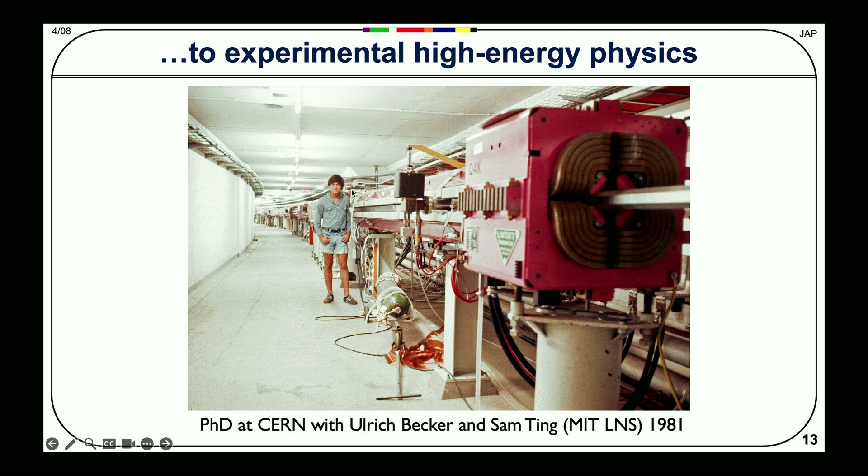That's me as a very young MIT grad student, working with Sam Ting's group, who had just won the Nobel Prize. That's my experiment at CERN, the intersecting storage rings, 62 GeV - more than 2 orders of magnitude less than what the LHC gets. But it was the highest energy at the time, about a half mile to 3/4 mile in diameter. Francois would know. This is what a big experiment looked like back then.

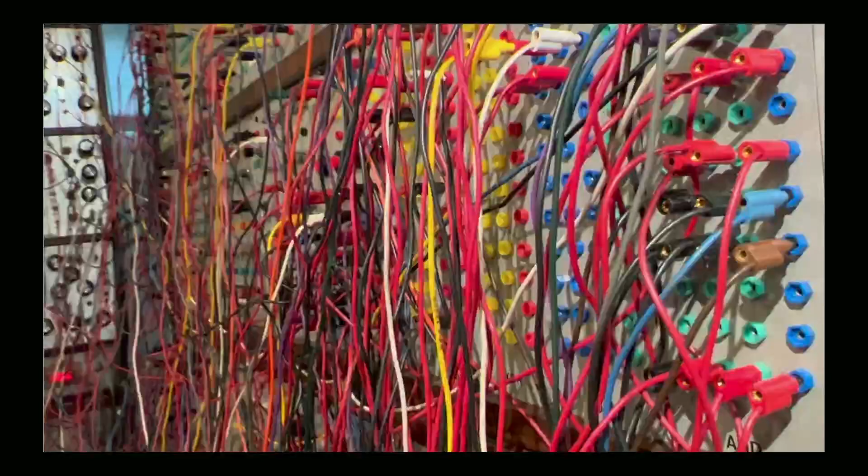This is, I think I showed this last time I was here. The last big patch I did about a year ago.

It's just again, dreaming to itself. Hundreds and hundreds of patch cords, lots of complexity, lots of sound - just an incredible environment to work with to make sound. And it just evolves and changes and goes into different modes.

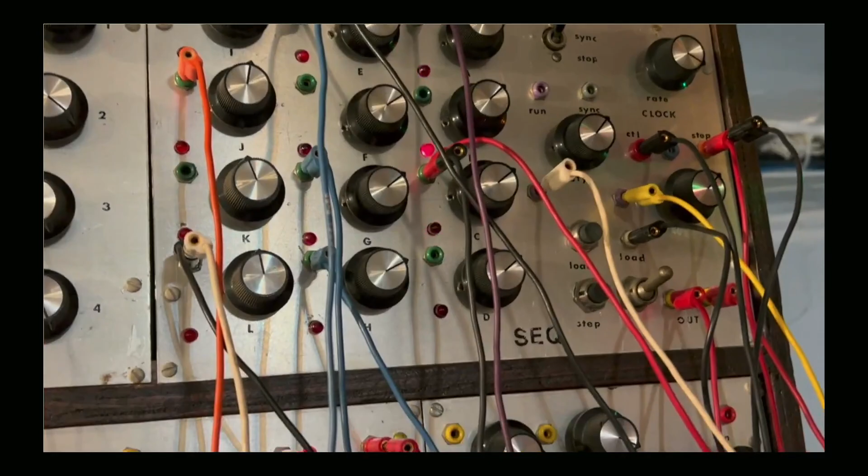I'm not touching a thing, it's just kind of dreaming to itself. It's a connection as a network, not done with an AI, but done with physical patching. So it's living at a much simpler level, but it's got all this complexity.

I'll talk about it in a second. We did a workshop with my group in Fribourg in Switzerland about smart buildings, and they have the world's greatest synthesizer museum there. It's a warehouse in the old Feldschlosschen factory, just filled with thousands of keyboards of every kind. There was a crazy collector who just kept collecting them, donated them all to this place, and they added more. To walk through that and see all this gear from the 1960s - they even have a Hammond Novachord from the 1940s, the first synthesizer - all the way to things that are newer, just an amazing experience.

And I gave a talk there just about the synth. If you guys are interested, they did a great job posting it online - you can search 'Joe synthesizer SMEM' and you'll find it. So that was the prelude.

Now moving very quickly on to the work I do at the Media Lab. We work at different scales, from wearables to smart buildings to smart landscapes, environmental sensing, and now more and more to space - projects that we actually do deploy in space. I'll try to cover quite a few of them.

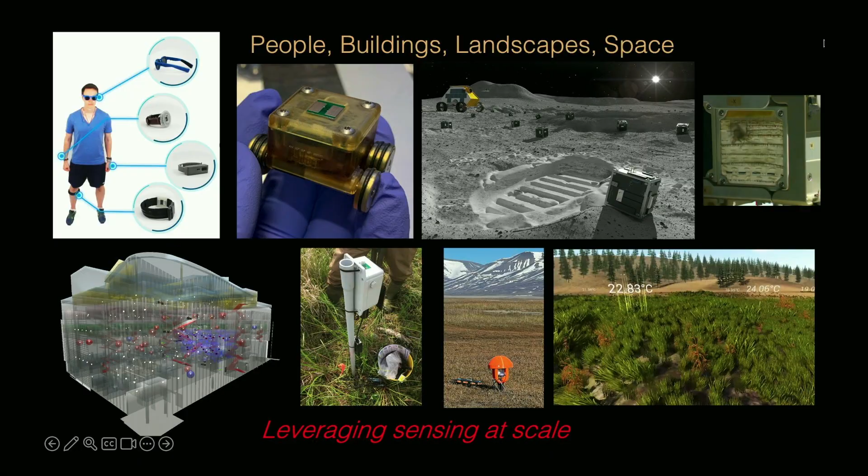So wearables - the Media Lab is the place that really gave the name to wearables in many ways. We had the big evangelists in the beginning of wearable computing at the Media Lab, namely Thad Starner, who went on to make Google Glass, and Steve Mann, who's a pioneer of everywhere augmented reality. And they had many acolytes, students that would just figure out how to wear a computer already in 1995.

They would live their life that way. Thad was living his life with wearable augmentation, with a display and with an interface and wireless connection already since then.

Steve was wearing TV cameras and displays since that time as well. So the stuff we're grappling with now in products, they were basically living with it in those days.

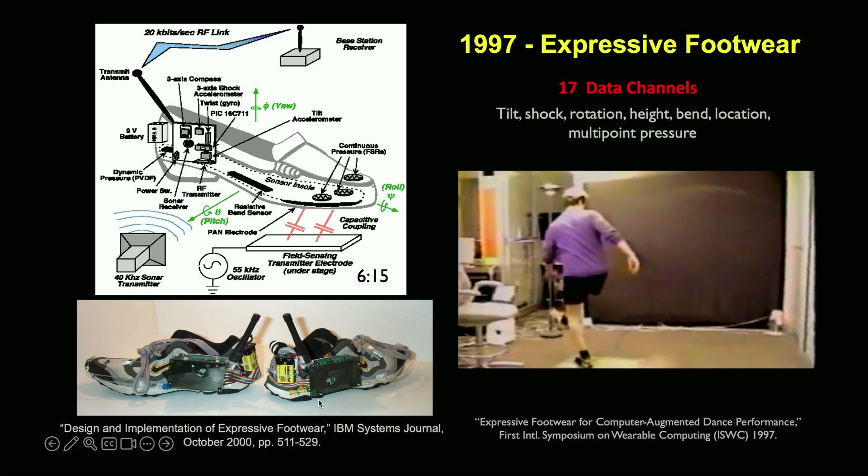We had a symposium on wearable computers and a fashion show and stuff like that. So we all thought of things we could do for the symposium and for the fashion show. I wrote a paper for a symposium and did an installation of a fashion show on a shoe for a dancer that had sensors in it. We did about 17 sensors per shoe, wireless right from the shoe to a computer, rule-based at that point, that would take the sensor signal, map it, and use it.

Now it's just, just walk past most of them. It's a different world altogether. That's sonar. And then we went on to work with wearables for extreme sports.

I met the doctors that do sports medicine. We developed a gait analysis system for them to analyze how you walk. Just a wearable sensor node for the foot already around 2002.

And then they introduced us to the doctors that attend the famous Boston sports teams, the football team, the Patriots, and the baseball team, the Red Sox. So we go down every spring training, build these sensors for the athletes, just strap them on and measure what they do with their hits and their swings, and then analyze it after with the doctors.

This is, again, middle of the 2000s. Very early for this. No one was doing it really with these extreme range sensors because they throw at 120 Gs or 10,000 degrees per second. You have to have the range to take all of that as well as slow motion. So you have to get all of that together and then fuse the data dynamically. High bandwidth wireless interface to get the data back at kilohertz, full sampling on all the nodes.

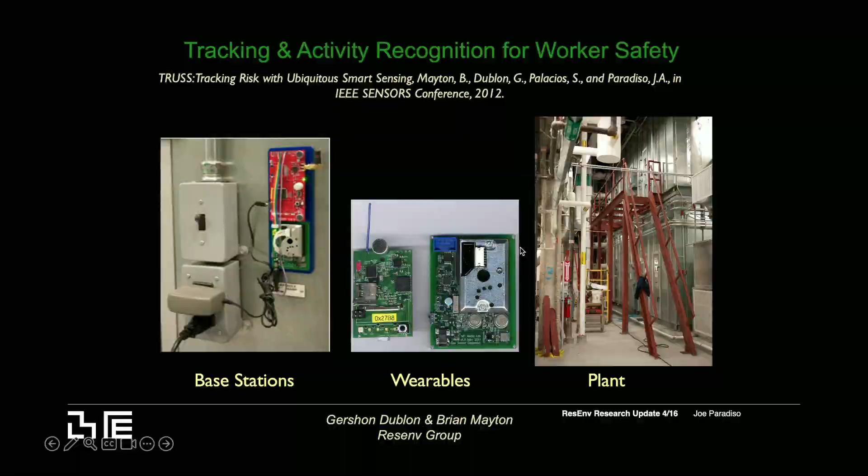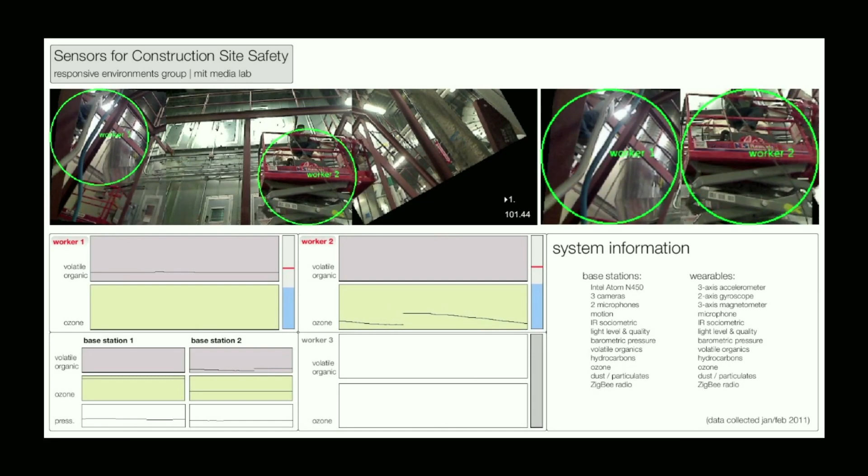So here's a video display that shows a worker here. We can tell if the worker moves, see the accelerometer move, we can detect who is who. So we can look at, for instance, the height with the barometer. If he's too high, we can flag it as red. So in the video, you start getting information back to the user.

And the background is actually colored with the gas. So if there's more organics, I think it's yellower. If there's more ozone, it's bluer. So through subtle alteration of video, you can start giving this information from the wearable sensors back to people that would want to monitor workers for safety issues.

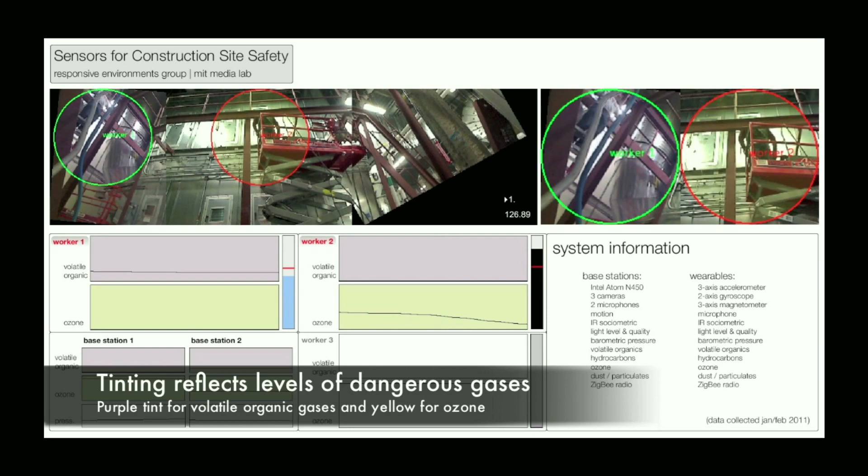My students would go to Shenzhen, China every year - they even went this year, MIT had a special arrangement to let them go. It's an incredible place to send students because it's a manufacturing hub like none other. Lots of the world's stuff is manufactured and prototyped there. We'd bring students into the factories, talk to integration engineers who explain how to get things manufactured at scale. It was transformative - students would go with an idea and learn how to spin up production and really make it.

This is what came out of one of these trips. In the mediated atmospheres project, we had the room change because of sensors - a chest strap, watches, a camera looking at you. Could we start doing some of these things just with glasses? Because glasses have access to various parts of the head - they can look inward as well as outward. Can we start doing things with glasses to get some of that data?

It's known that the difference in temperature between the bridge of your nose and your temples can relate to cognitive load. There have been studies - it's a noisy measurement, but the effect is there in Stroop tests and tests that stress people out and load them differently. You can see an indication of cognitive load just by measuring temperature with a thermal camera, but you can also do it with thermopiles. So we put them in the frames of the glasses, measuring temperature at the temples and at the bridge of the nose, plus other sensors.

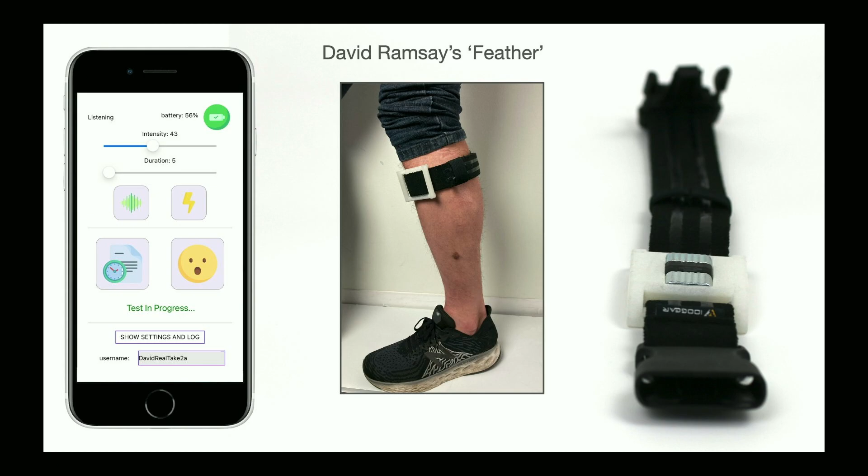So different ways of putting people in different experiences to look at engagement and measure it with devices like these. And he did see signals with the watch - people did have distortions of time depending on what they were doing. They would catch up because they'd realize they were working on a different time scale. This is the color shift. He did some studies himself, like we did with the people in Fribourg and the leg vibrators.

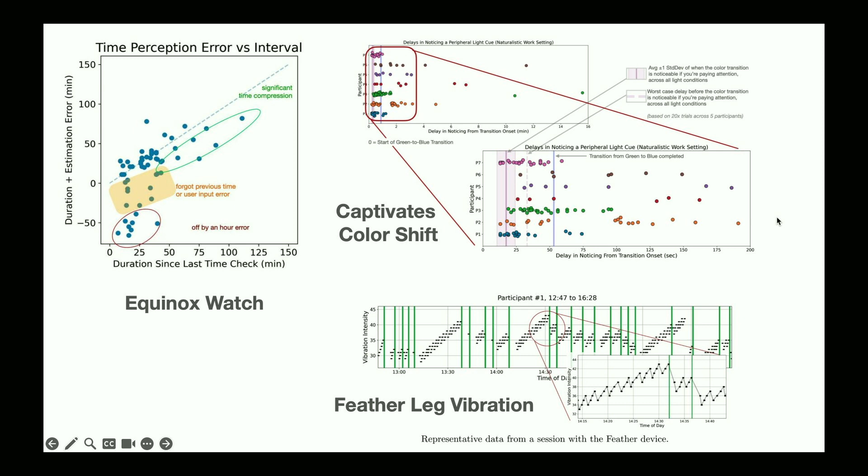He also instrumented his life, put his life online in 2023. He had this concept: can I be immersed in things that are all convergent, as we are now with modern devices, and then make them just segmented? He would get his text on a label printer, he would not carry a phone, gave up his phone. He would do email on a pad that could only do email, nothing else. Things like this really segregate every part of his life, and he would measure himself with the glasses and other sensors while he did this.

So this is David talking about it.

Can you crank it up? Is this working? Do you have audio at all? You should, unless this gave up. Well, he's talking about what he's doing - it could be that the interface decided it didn't want to work anymore. I can plug it into the regular one. Can I pull this out? Okay. Let me... I don't know, this is David saying essentially what I just told you, so I don't know if I'll go back there. But let me go to sound here quickly. Here it is. Where's control? There it is. Let me go to that. Okay, I'll go back. Now, capture and share. That's interesting, it doesn't realize something is plugged in. Did something unplug? Weird. Very weird. I think something gave up in your connector. Yeah, I can do that and put the microphone by the speaker. Don't have too much time left. But hey, he gave us his phone for that - old-fashioned phone, he's an old-fashioned guy. Okay, good. Hello. Okay.

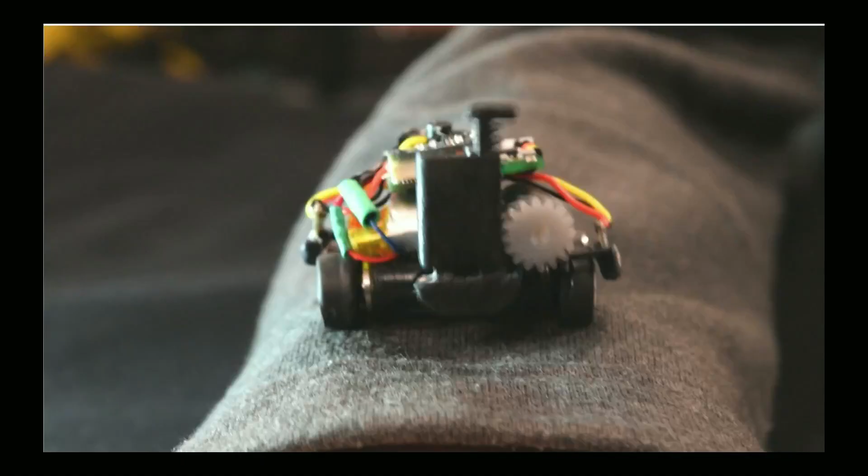This is some sort of notification. Jewelry that can move - this is work that Cindy Kao did, one of the other students at the lab. You get a call, and you can have the microphone come up to where it's best placed.

And again, we could navigate and find their way across clothes, lots of different algorithms to do that. Then I told Artem, rather than think about crawling on the clothing, I was trying to think of what is that good for. It's good for a few things, but it's hard to get a good use case.

Crawl on the skin - so he built a set of robots that could crawl on the skin using pneumatics, using flexible robotics. You could put payloads on them, for instance a camera to image, or make measurements with electrodes and so on. You could even have a needle to do targeted therapy.

He eventually made it light enough, found the right motors, that it could be untethered. It had trouble moving, but the pumps have gotten even better. So we could start really thinking about robots to move on the skin for telemedicine, where you can't get a gantry robot - the robot can go find something wrong and do some therapy or diagnostic.

We published that in IEEE EMB, the Transactions on Biomedical Engineering. It got the cover, so they liked it.

After high energy physics, I spent a career working in spacecraft control with Draper Lab, so I became a rocket scientist for a while. I thought I was done with that when I went to the Media Lab, but no, space is much more accessible. We started a space initiative, flying things in zero gravity flights and getting things into space very quickly. It's actually very easy to levitate in zero gravity.

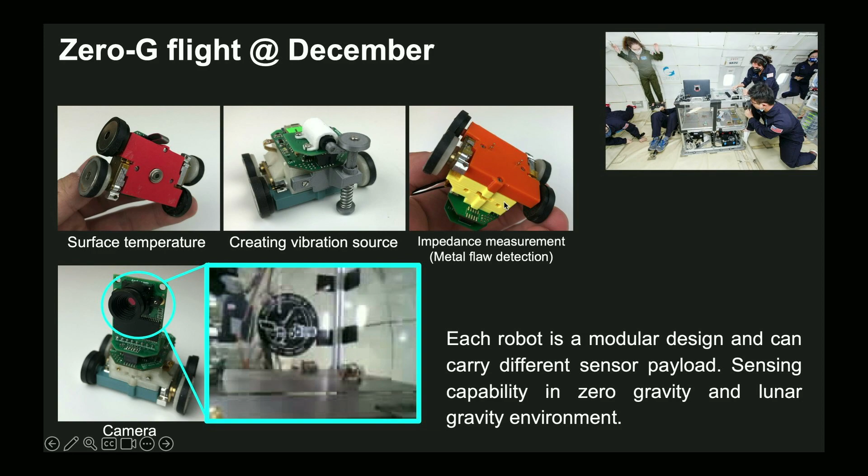So we've put different sensor payloads on them, more suited for structural analysis, and flew them in zero gravity. You can see this in zero-G flight, looking at different modes of locomotion and attachment.

And of course we can think about getting things to the moon now, right? The moon is much closer. These were all the missions that went to the moon, all the landers before the last year or two - it's just exploded now. We almost landed on the moon. We did land on the moon with the IM lander, but unfortunately it is at an angle.

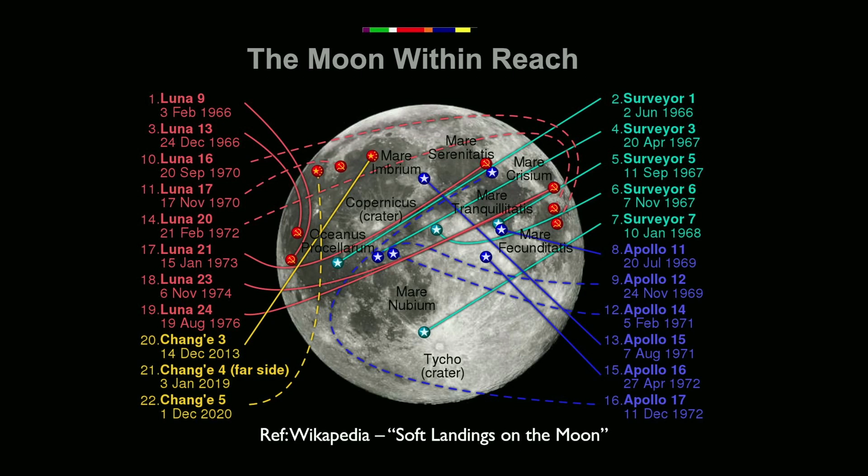We have a payload, which I'm going to talk to you about now. So I'm hoping that one lands vertically - they learned their lesson, better always to be on the second mission, not the first. So yeah, this is the little rover that's going to go on top of that lander.

It's by a company that's a spin out of MIT, and we have space on it. Nokia is the main payload. They're going to fly a 4G radio there and start playing with 4G on the moon, more or less, to say that we've done 4G there. It's going to be on the lunar south pole, kind of where the other lander landed, or more or less landed.

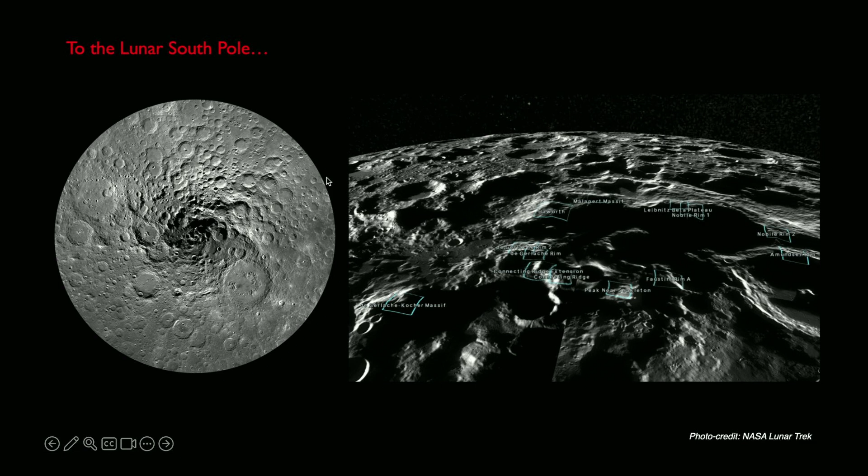This is what we're flying. It's one of the micro robots, designed to be a diagnostic for the bigger rover. It's going to measure the heat capacity. The top face of this is a heat shield, or a thermal conductor, a radiator. It's going to measure the position dependence of the thermal response. It's got a little thermopile down below. So when it lands, we'll open that little garage, and it'll come crawling out. Hopefully vertically. So that's the thermopile.

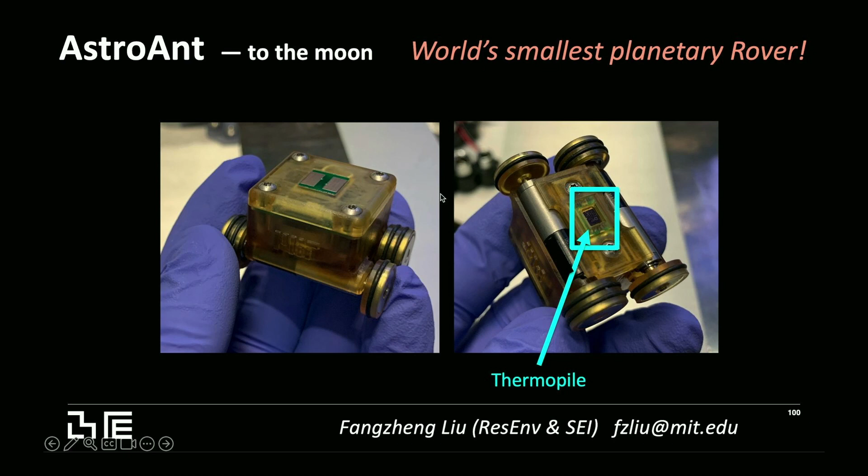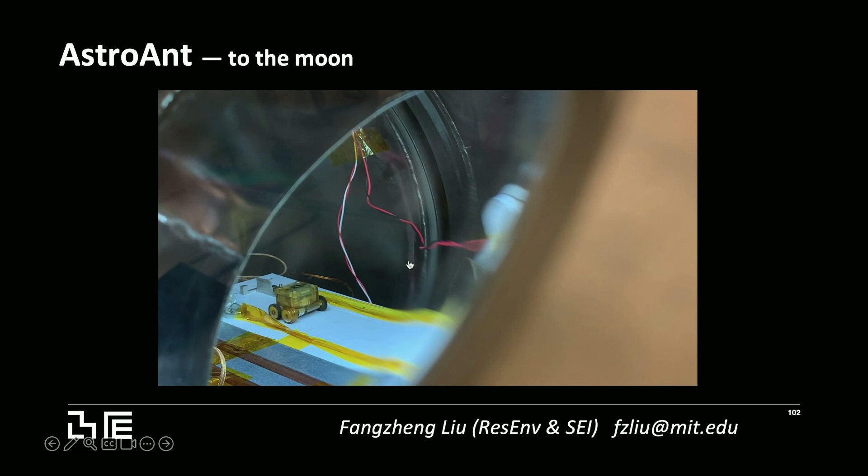This is a charging port. It's all space qualified motors. We ran it in a TVAC test. It's got a little heater so it keeps the right temperature. This is a breakdown of the whole thing. And that's it crawling out of the TVAC chamber that we have at MIT AeroAstro. So we space qualified it.

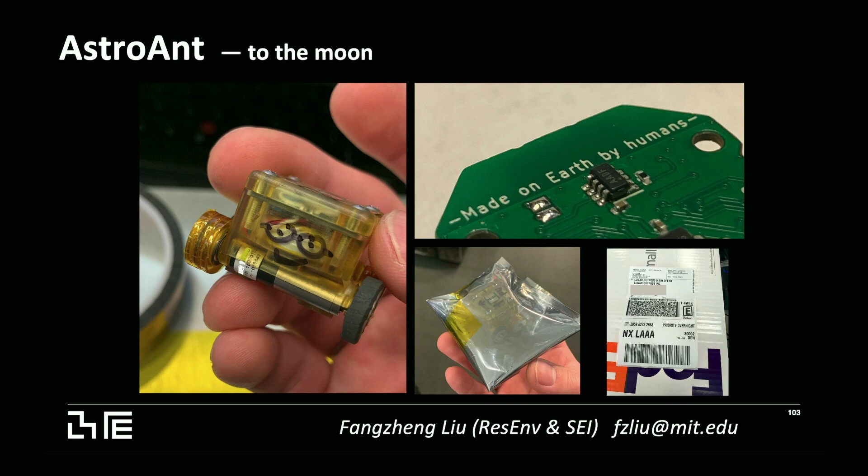And every great voyage begins with a FedEx package. You can't FedEx to the moon directly, but we did send it to the integrator, and that is going on to the moon. It will land on the moon, hopefully again in a functional mode. And also we have a camera we developed, took an Azure Kinect camera, a commercial camera from Microsoft, and made it work for spacecraft, using Linux Docker containers and stuff like that, the whole command language for it. This is the work of Don Haddad in my group.

And finally, moving on to Sensate Media, smart materials, sensors getting into materials. It's an intriguing area for us. Ever since the mid-2000s, I've been thinking of ways of taking sensor networks that are meters apart in the physical world, and putting them within millimeters or centimeters of each other, so you have a computational fabric that senses, networks and computes as it flows, the way the nervous system synapses and processes signals that come from our receptors.

So we did lots of them over the years. I'll show quickly a few of them. We've got a paper published in IEEE Pervasive talking about the field in general and tracking some of the projects. Irmandy in my group is a PhD student coming from ETH, from Troster's group, a well-known group in wearables. Before he came, he had designed electronic dresses for Lady Gaga, it turns out.

So he had some of that design talent, as well as being a really solid technical guy. He became kind of a weave master for Sensate materials. He weaves structures that can measure stress and strain by how you weave it. You have piezoresistive elements you can integrate in, and other layers of fabric that can exhibit a response when you press, squeeze, or stretch them. It comes off of our knitting machine. My lab is now dominated by a large knitting machine. Irmandy is its master, and it's producing e-textiles.

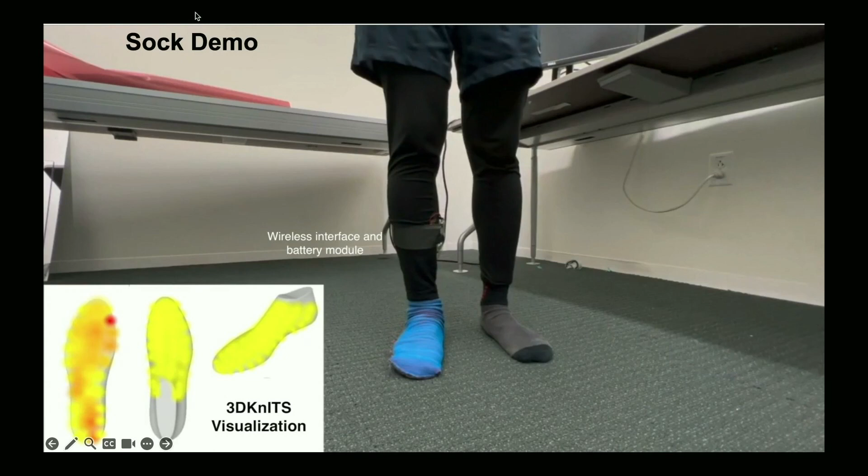He also develops very dense sensate weaves using thermoform yarn, so it can take the shape of a sock or a slipper, but measure dense pressure. If you want to look at gait dynamics, if people have trouble with their feet, you can put this on, wireless interface right from the thing, and as you're walking, just in the fabric itself, it builds you a pressure map. I got this on the MIT homepage a while back, and you're seeing it here. As he's moving, you're seeing the pressure change. So this is like a sock, but it's a sensate sock, totally flexible.

And he's built into carpets, doing interactive dance with them. This is a dancer on his carpet. It's measuring where she is, how hard she's pressing. It's got an XY scan, two electrodes, X and Y, and it's got a piezo-sensitive element in the middle, piezo-resistive. We're just mapping that into response.

This is an event we did in Bangkok. It's traditional Thai dance performers on a carpet like this.

This is machine learning, again, it's going to happen with everything. Now he's using it to classify different kinds of walking and different kinds of foot motion. So walk, run. He's also a yoga practitioner, so it can look at the different... all my emails are coming in now, sorry.

But he got distracted from his thesis project by a grant from Burning Man. They saw the e-textile work he did, he won several design awards. They gave him money to do a huge e-textile installation, a massive kind of teepee with sensate weaving in the fabric so people could interact with it that would be on display. So that was the design he worked out.

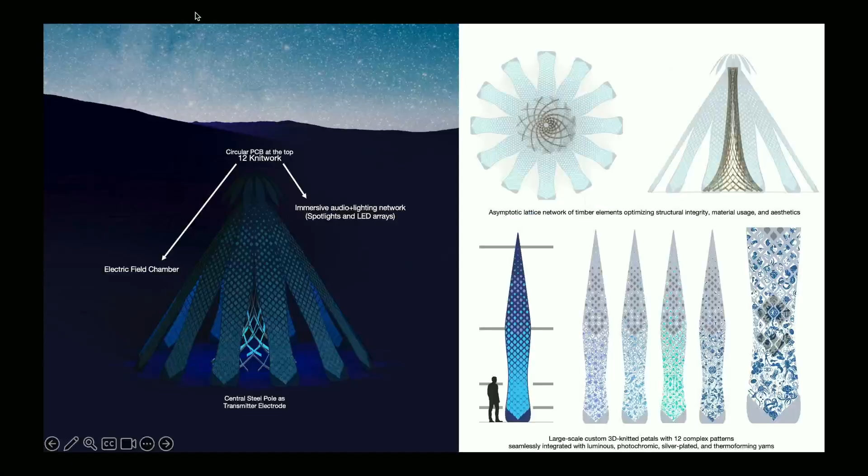He actually wove a version on our knitting machine. These are the sensate electrodes, they're all in different kinds of patterns. Every one of these is a different kind of cultural identity, the patterns kind of reflect that, and they're all sensate. This is Irmandy with them all stretched out in our atrium when he was trying to make them work.

This is at Burning Man, so a whole MIT crew came to design the structure and put it up. It had to withstand 90-mile-an-hour winds. They designed it, that was a requirement. And in true MIT tradition, they did it. I'm glad they did.

And of course, it's Burning Man, who the hell knows what they do in there. But it ran for a day or two. Then, of course, the weather turned bad, so there were dust storms. They did have intense wind, they got pretty pummeled, and then it rained. So its life was cut short at Burning Man.

But we brought it back to MIT, and this is Irmandy running it. Can you crank this? Hopefully it works, you never know, it may not. But there's music that's coming from his motion. I think that's weird, this clip just does not want to work, I don't know why.

You can hear a little bit there, you got to really crank it. That's a dancer that's working, it's measuring his position in between. It can see whether he's touching panels, which panel he touches as well. And as he's moving, it's doing things.

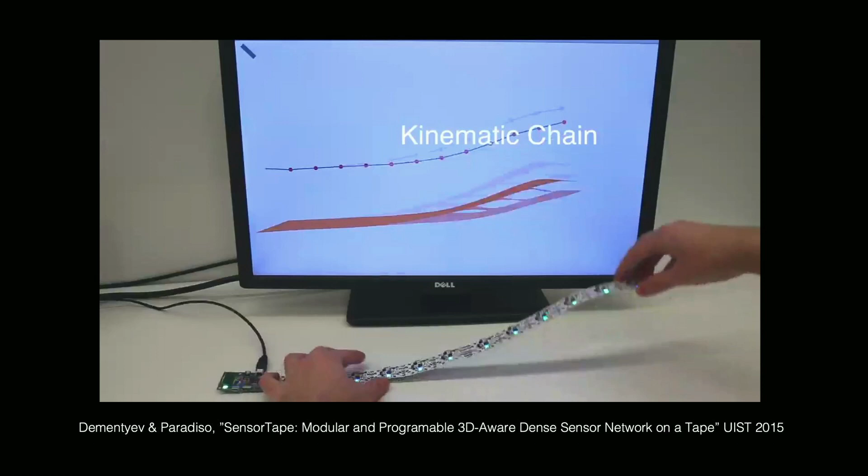And then we've done versions of it on tape. This is the sensor tape, it's thinking about sensing as utility. So you have something like a tape, you can cut it where you want, it's the shape of a roll of tape. We have IMUs on it as well as other kinds of sensors. Again, you can bend it, recapture the shape just by plugging in at the end. It has also proximity sensors, you can make a little touch screen if you want, or capture geometry, or even capture posture.

So here he's getting his back geometry. My student Cedric made that on a tiny fiber. This is recent work, taking technology from the LED industry that he developed in Shenzhen. You have this tiny piece of flex circuitry with inertial sensors and other sensors on it. You can make it quite long and measure this parameter along the length of almost a wire, almost a fiber. You can knit that into clothing, and then we flew a version on the space station.

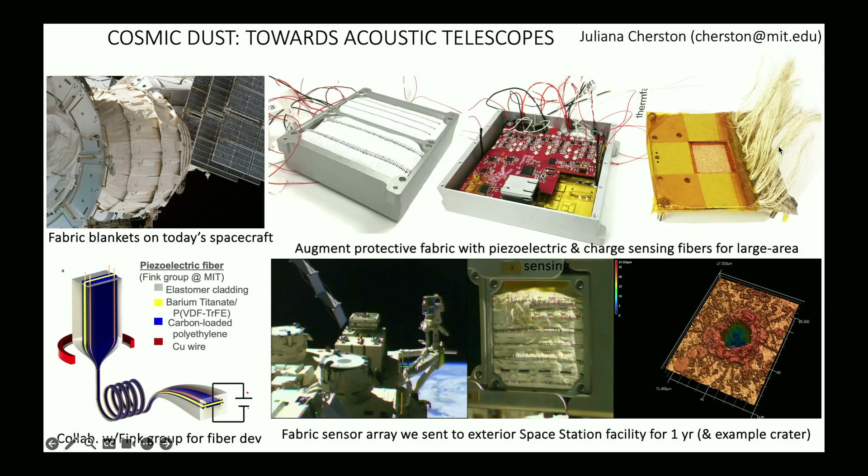This is my student Juliana's project, putting piezoelectric fibers into a piece of beta cloth, the cloth that lines spacecraft, to measure micrometeorite impacts. We flew a passive and an active sample outside the space station a year or two ago, and that's it launching on a Falcon that was installed on the space station. That's it outside. These are her fibers.

And indeed, we measured what looked to be hits. We may even have something that's almost like wind. There's atmosphere there, and we can see a tidal effect as you go around the Earth—it's resonant with the orbit as you have atmospheric bulge, and there's some background from that. Then we also see discrete hits coming in, so we could be measuring microparticle impacts. We have to do a little more analysis.

We won the Aerospace Prize in the NASA Tech Briefs contest with it, and then we also won a grand prize that year.

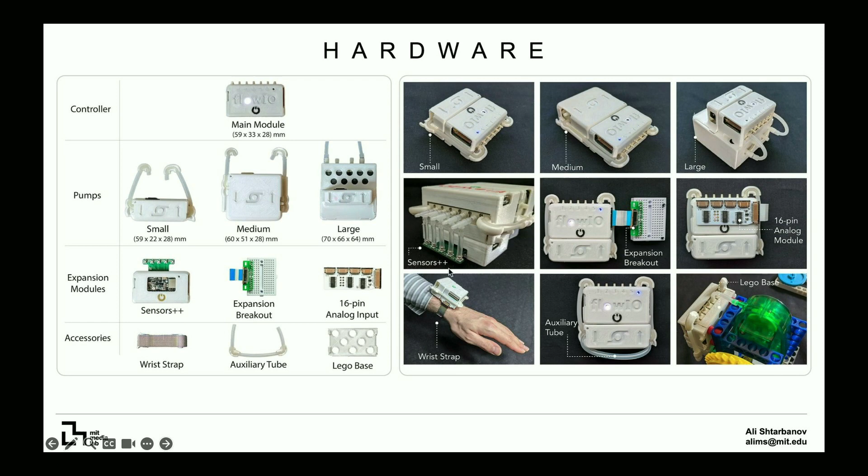A project my student Ali did: it's a pneumatics toolkit he calls FlowIO, a whole modular system to look at soft robotics and pneumatics. It's an amazing ecosystem—he's created it with people around the world using it and adding new designs. He's built a whole following around this.

We use it in spacesuits for astronauts, where we can compress the fluid in zero gravity that flows to where it shouldn't be. We can actually compress the legs dynamically with this FlowIO, and then with Irmandy's fabrics, measure how the body responds, measure the pressure that's there. Our magnetic boots—I told you about those.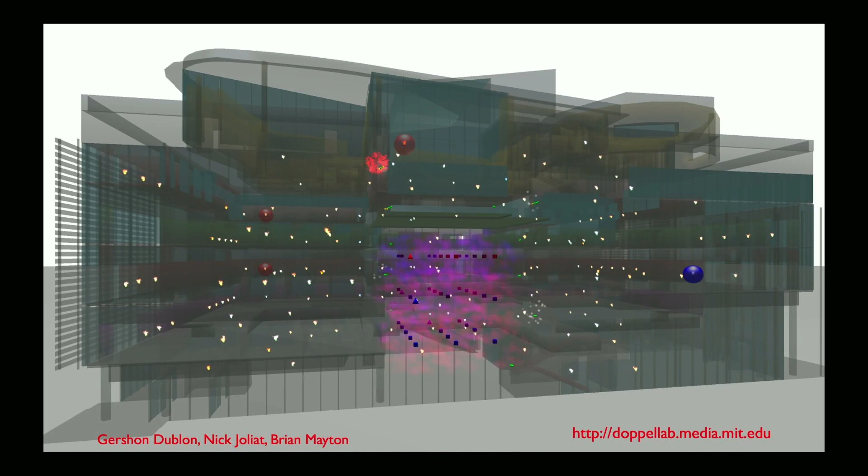This is the Doppel lab, this is the media lab—you can see sensors inside. This is what we call a digital twin now, right, trying to bring this data into an animation. You can see these offices are too cold. This is the temperature and humidity in the atrium—they're too cold if blue, hot if red. So through the animation, we bring everything up to the user. It isn't bounded by the laws of physics—you can flow through, experience the building in different ways, people moving around. And then we had audio, and you want to turn this up.

If people are talking and you're near a microphone in the virtual world, as well as in the physical world, you can hear through, it tunnels through. But you cannot understand a word they say. So you crank it.

He's laughing. You can't understand anything. And then we went outdoors.

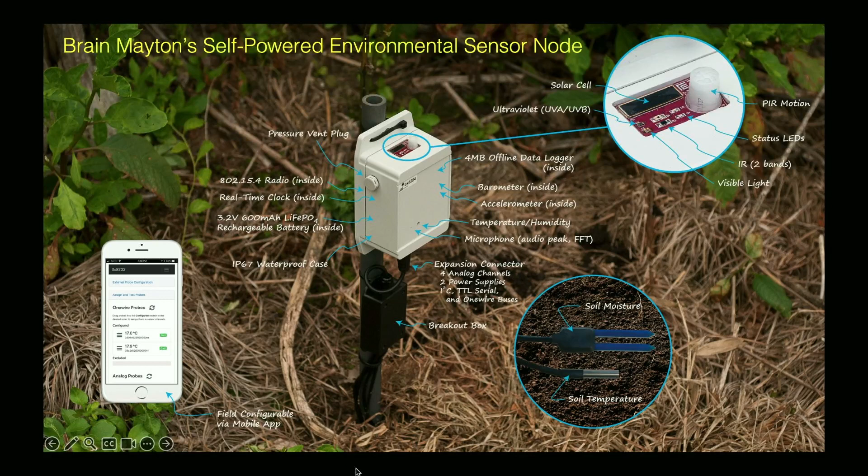The work at Tidmarsh Farms, one of our retired faculty co-owned a cranberry bog that she turned into a wetland. And we built an environmental sensor that could measure what goes on in the soil, see how the environment around is, and be part of a low power wireless network. Still running now there. We've built over 100 of these.

Put them in different kinds of environments on the property. This is a transect that we built. Of course, a wetland, stuff goes into the soil. It's expandable. Put all kinds of sensors that could go underground into the soil and connect back up to the sensor.

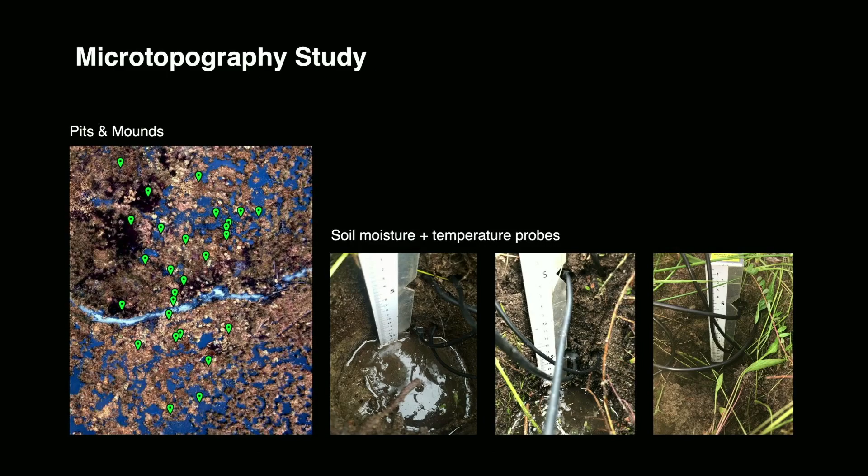This is a different mapping, it's very localized. As you near the sensor node, you're hearing what physically happens there. But again, it's put together by a composer. It's an aesthetic experience as well as an informative one. And I think this is important. Artists are going to bring this world of interpreting all this other information up and close to people.

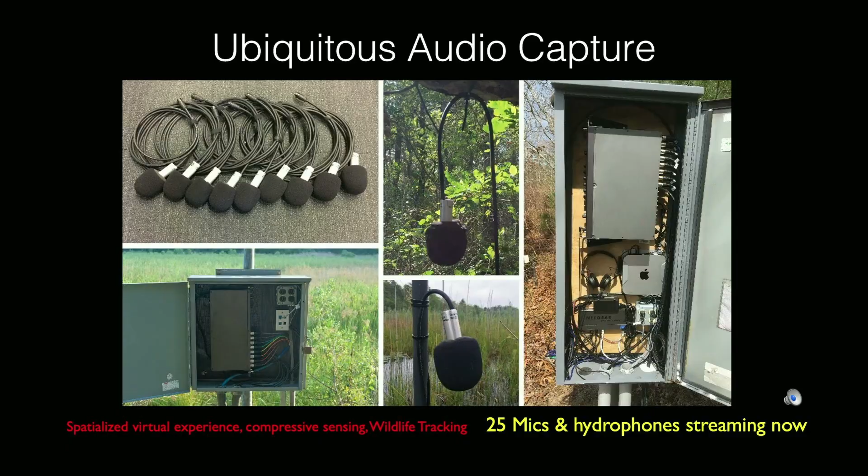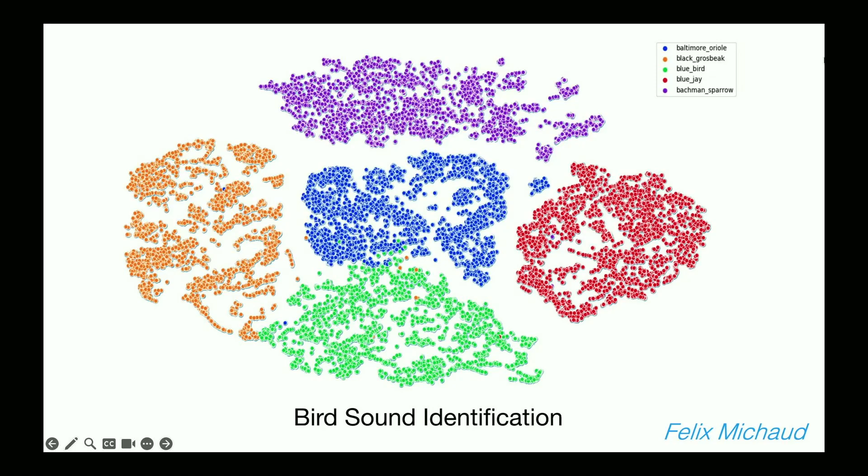Cicadas coming out at different times, different birds arriving at different times of year. All this, we have years of data. We can go back with AI and mine it, bring it back.

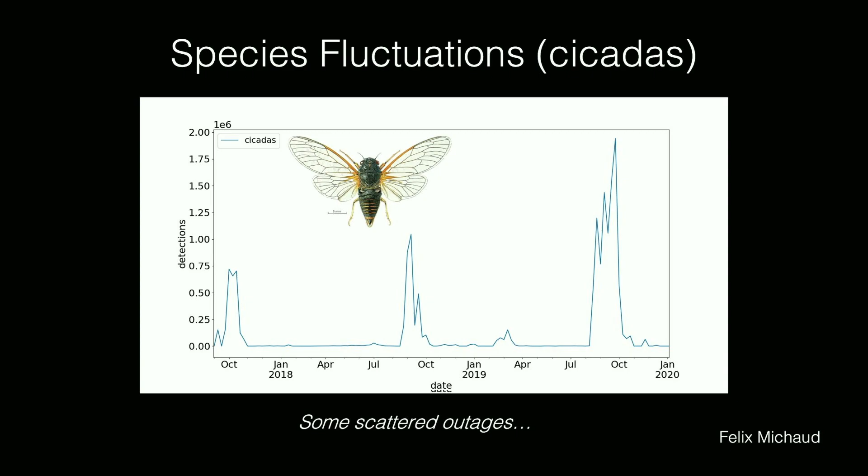You have someone in the real world that wants to connect with them. Can you start letting them hear through these things dynamically, like it's an extension of the ear? So it knows where you are. It knows how your head is facing. It knows where the sensors are. It can fade the right audio into the right ear. So it's as if you're there. And we don't do it by covering the ear.

We use bone conduction. Important to leave the ears open. Thomas is looking actually at pass-through. You can do it now with modern earbuds. You couldn't do it back then. But I think there's something special still about leaving the ear open. We'll see in this data. But yeah, we built this 5-6 years ago. Tried it at Tidmarsh. And it's a totally different experience for people. It's like your ears are tremendously expanded.

This is Dan Gauger, who is a fellow at Bose, designed all of their noise-canceling earbuds and headphones. For him, it was a totally different experience. So he's moving.

He's hearing. He's never heard before. I'll go from hearing - this is the last thing I'm going to show.

My student Patrick has a collaboration with National Geographic. He's in Patagonia now. They seeded a collaboration with my group and different groups of National Geographic explorers to look at some needs they have, design a sensor system to address them, and then go deploy it. He's acoustically tracking these wild bees, the size of your thumb. They make some noise, but if you have a distributed acoustic system, you can track them accurately and identify individual bees and see where they're going.

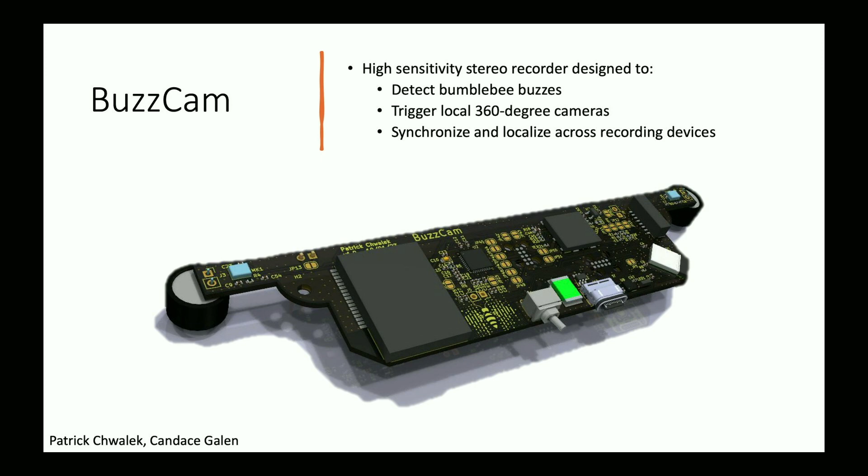We also have a collaboration with a Thai real estate company, like what we did in Tidmarsh, to take all the sensor data. We're putting sensors in an urban forest outside of Bangkok, and we're using AI to do the mapping. Instead of a set of hard-coded rules like before, you basically explain to the AI how you want the information from the sensors to change the music, and give it examples of the kind of music you like. Here he trained it on Balinese music, giving you a totally different way to map data into sound.

We're doing it also with the Large Hadron Collider now. We have a collaboration from years ago with the Atlas experiment, and we're getting a real-time data feed. Before, we had a set of rules that composers could use - we gave them a template and they could create pieces so you could hear collision data in real time through music. Now we're doing it through AI: give it examples of what you want to hear, describe how you want the data to map, and the music comes that way.

We're going to show it, I think, at the LHCP conference - we're targeting Boston, at Northeastern, in June. So that's coming. Okay, I think I'll stop here. Thank you very much.

Sorry for the audio, there's definitely audio problems somewhere in this machine. I'll find out one day what they are. Is there Q&A time? I guess we have a few minutes - it's getting noisy.